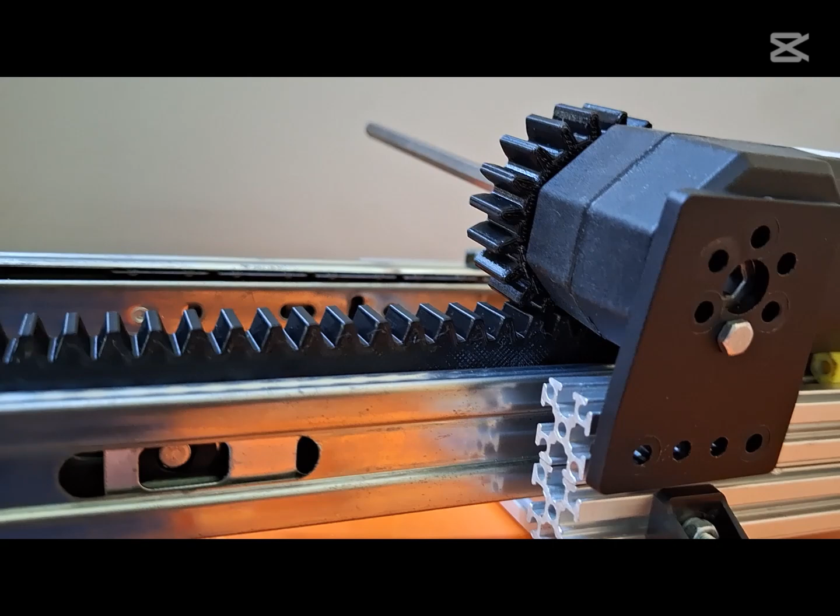Good morning, guys. I've created the rack and pinion system for a gripper that we created that can slide in and out with the rack and pinion. The problem that I have is that this bracket here in front of us is not big enough for this rack and pinion system, so we are going to have to create a new one.

Okay, great guys. We are going to create a bracket for the hex motor on our rack and pinion system. So the first thing I want to do is get this thing out of the way, and then we're going to start up FreeCAD, because that's the software in which I create all my stuff for the robots that we are using for First Tech Challenge.

Okay, so I'll start with a new document, create the body, create a sketch on the body and the XY plane. Okay, that's what we are going to do. So I'll move this a little bit. This is our origin point, for those of you who don't know.

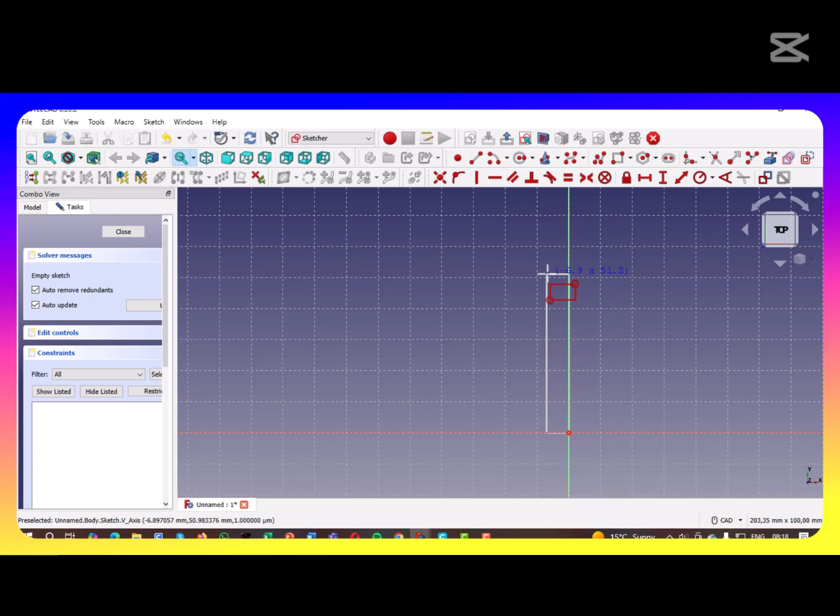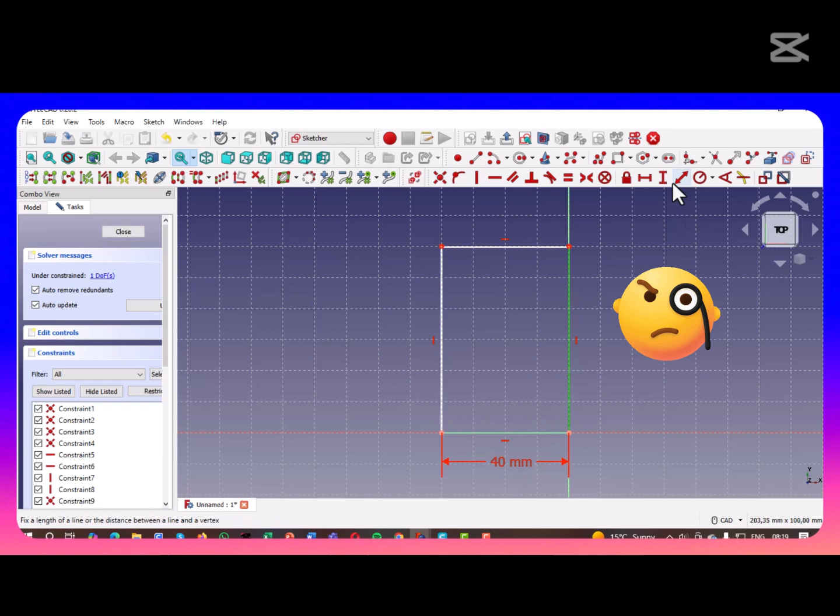And I'm going to start with a rectangular shape like this, roughly about the size as the brackets that is provided within the Tech Challenge set. So the width is about 4 centimeters, 40 millimeters, and this is where the difference comes in. The length is a little bit longer because our bracket is shorter than the one in the box, shorter than this one that I wanted to create, to make sure the rack and pinion fit. So this will be the first and the start of it.

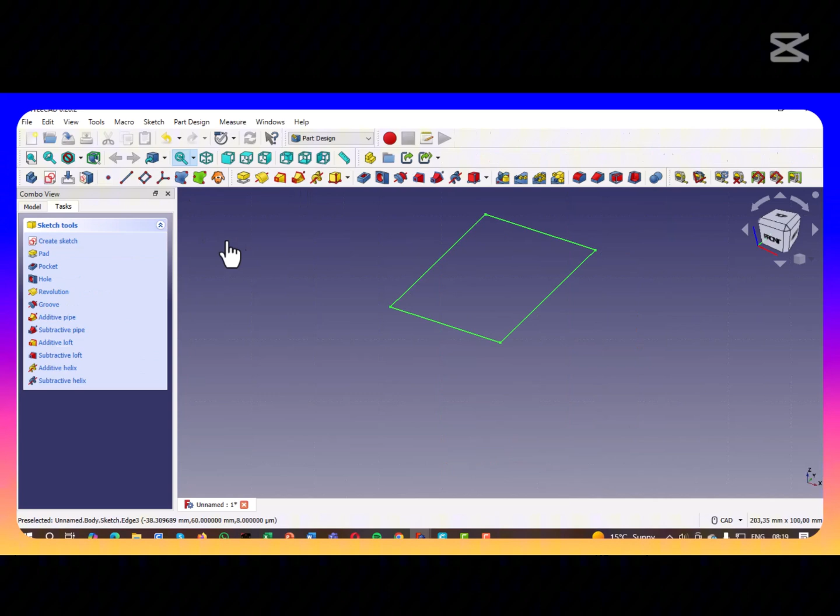So 40 by 60, and we are going to close this, let's pad it. Normally when I do this, I'll pad it around about 4 millimeters. Okay, and then on this plane I'll click and I'll create a sketch on this plane.

So if you have created anything for the Tech Challenge robots yet, you will know that the extrusions are 15 by 15 millimeters. So basically halfway there is where the slot is of the extrusion. Okay, so I'm going to do this.

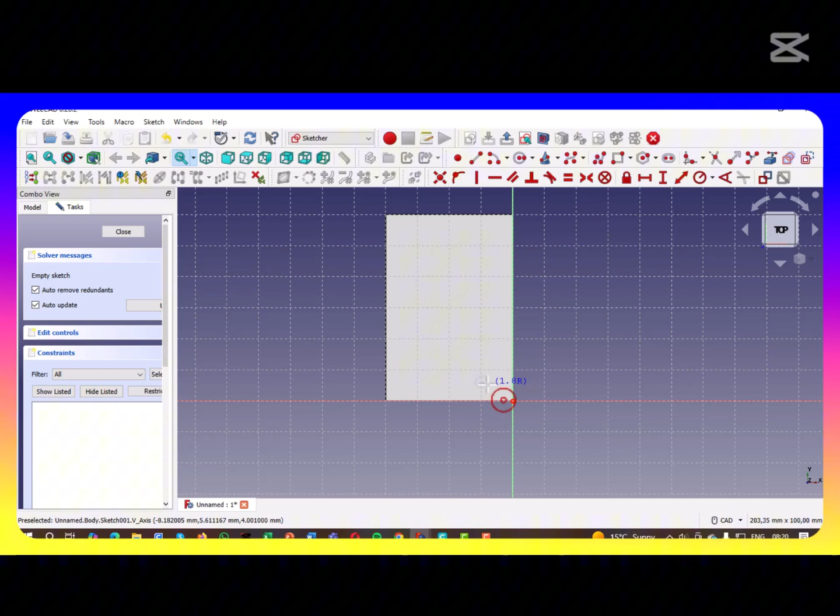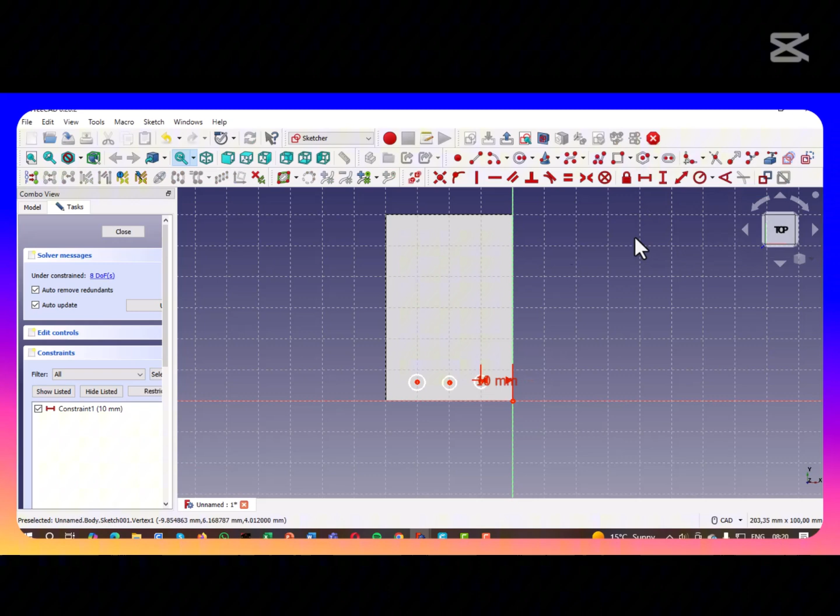I'm going to create 3 holes for nuts to fit in, to connect it to the extrusions like this, and I'll right click to get out of the creation tool. So first of all, I'm going to set the distance for this one to 10 millimeters, and then I'll just paste them.

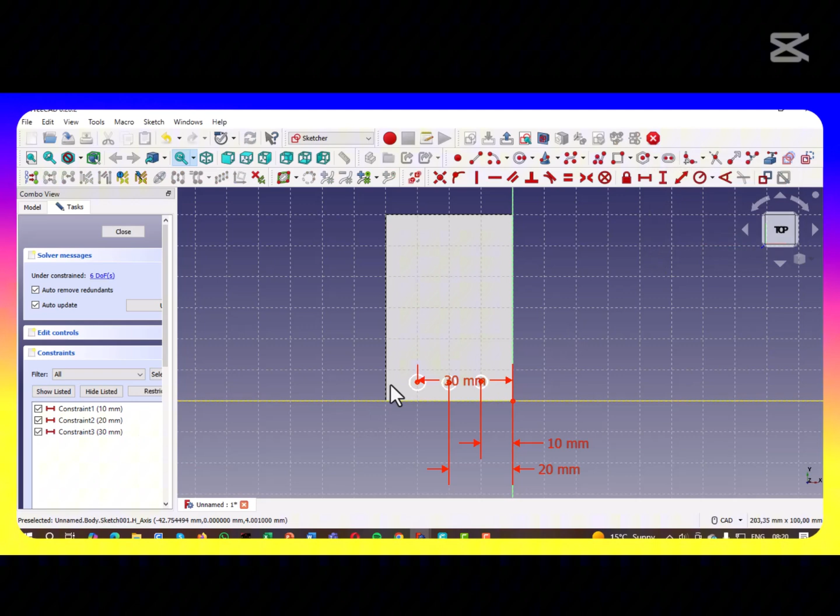So that one from there to there, you can see 20, and I'll move them up, and from there to there we'll set it at 30. That will give us the distance that we need.

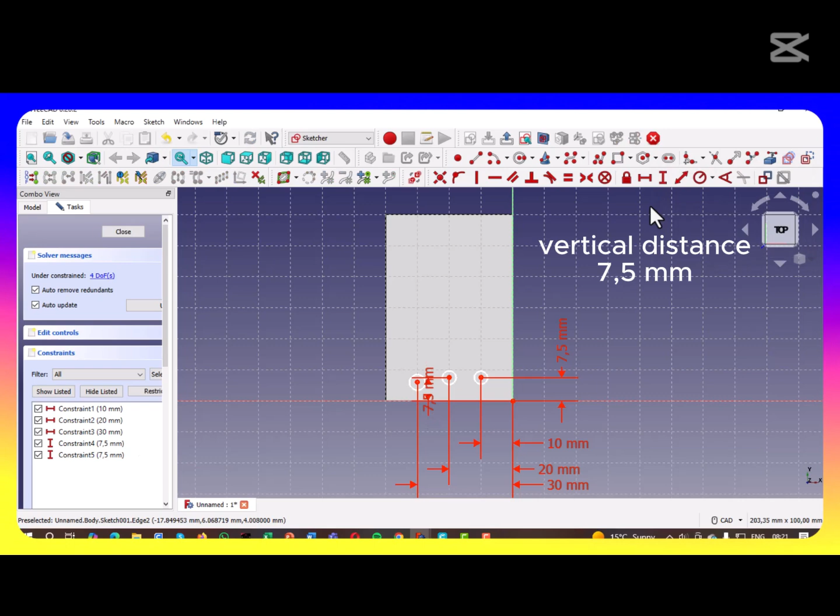Now the height is halfway of the width of the extrusion, which would be 7.5 millimeters. So we'll set it like 7.5 millimeters for each one of these. Let's just do it again, from there to there, 7.5. And from there to there, 7.5. We've got the height right.

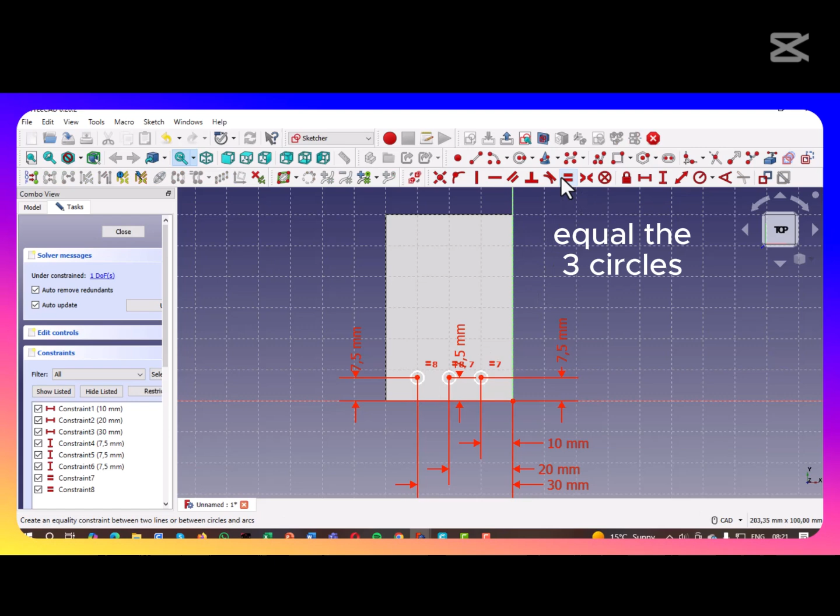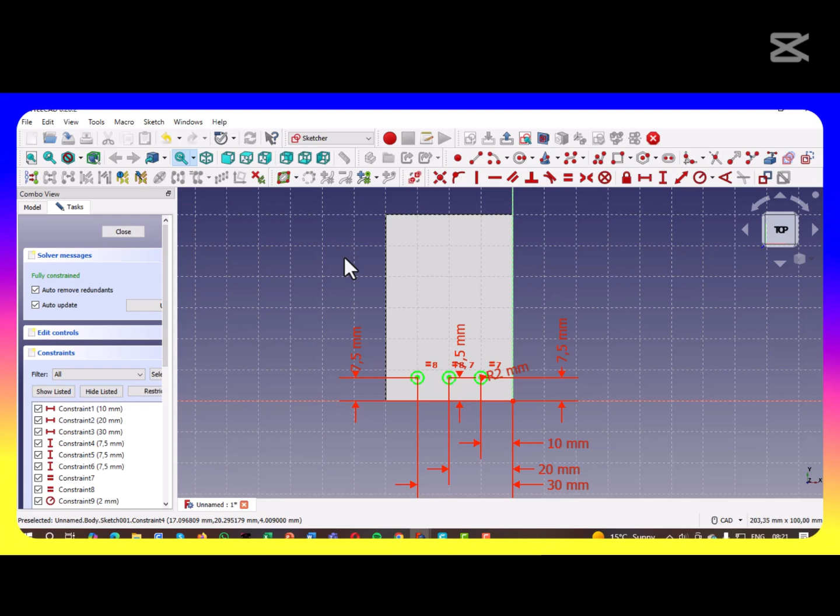Now I tend to do this: select the 3 circles and equal them so they're the same size, and then I'll set the size of the circle to 2 millimeters on the radius, which means it's 4 millimeters. It's a little bit bigger than it should be, but if you made a mistake and didn't get your measurements quite right, it gives you a little bit of leniency, else you're going to waste a lot of space or filament creating things, and then it doesn't work, which is time consuming and wasteful.

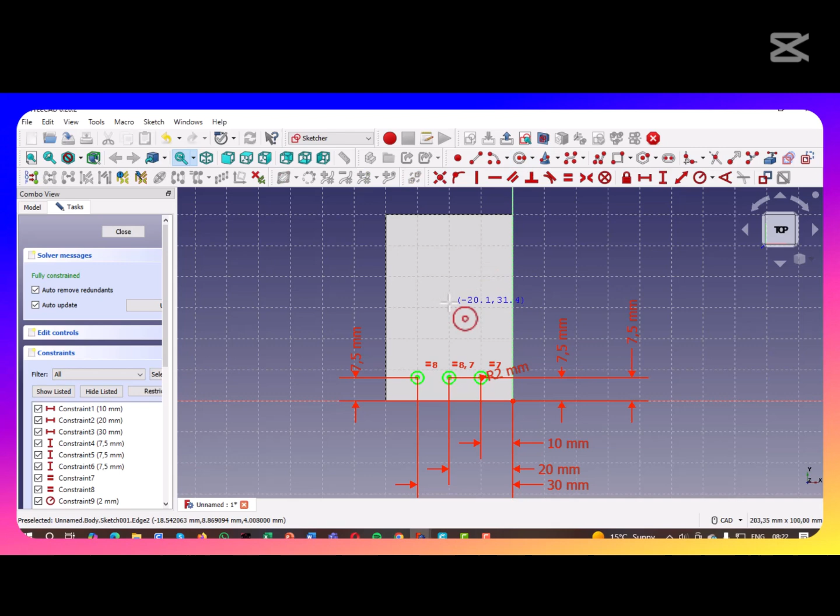So next in line, what we need to do is create the bracket or the fittings for the motor itself. Now this is supposed to fit to the extrusion, so from here upwards you're going to look at the measurement of roughly 20, 25, 26, let's see, I'm going to create a hole there, and then from here up to there I'm going to set it to 27, that would be just fine.

And remember, if you create this, you always have to constrain it both ways, vertical and horizontal, on a 20 millimeter line. And we'll set this one again to the same size as one of these, and we just equal it. Now those are equal.

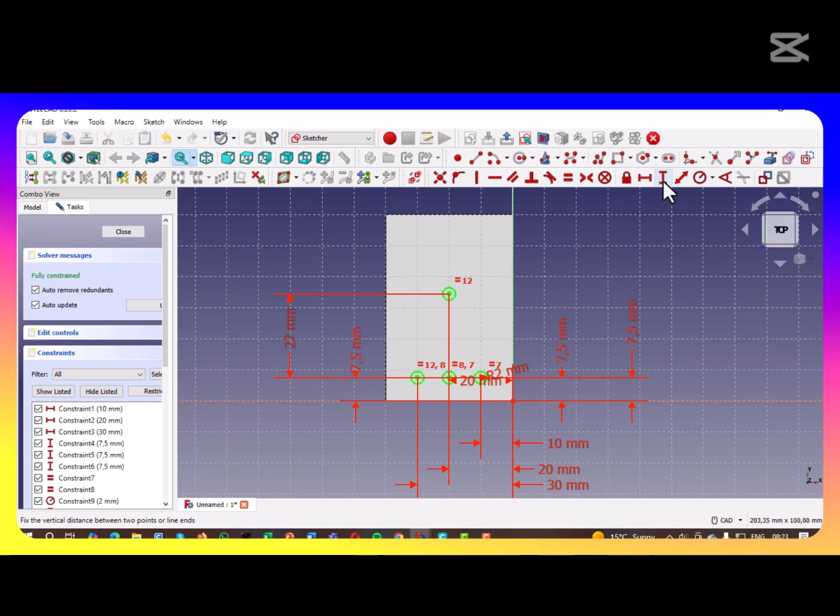So the next thing is the distance between this hole and the top hole where you connect the nuts for the motor is normally 17 millimeters. So I'm going this way. I'm going to add another hole like there, and from here to there I'm going to set it to 17 millimeters. That's pretty much about how far it should be apart. Again, I'm setting this to this, equal.

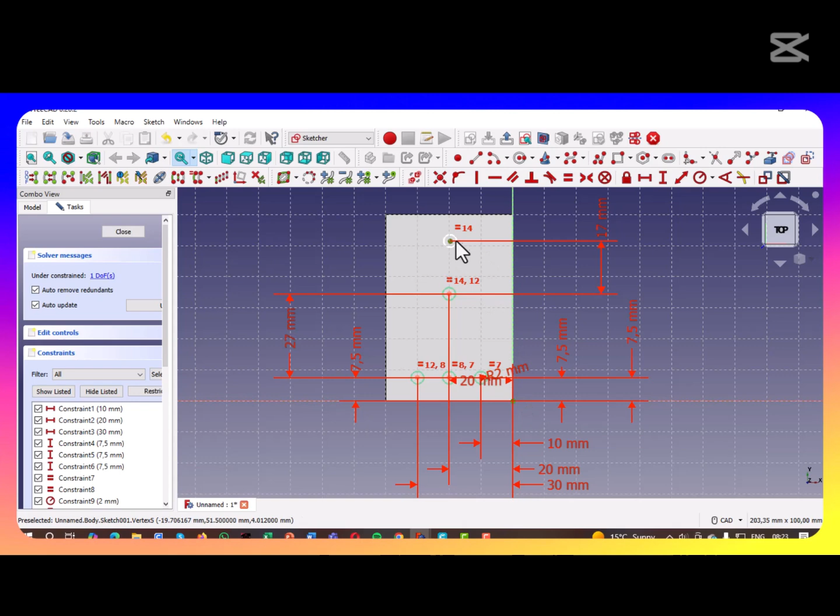Normally it will give me what I need, a little bit of leniency. If I made a mistake somewhere, it won't be the end of the world. So there we go, now all of these are already constrained. You can see it's fully constrained there.

So the next thing I'm going to do is create a big hole for the axle to go through, and I'm going to put it in between here, straight in the middle. So I'll just create it. It should be 5, so let's make the size of it 5.

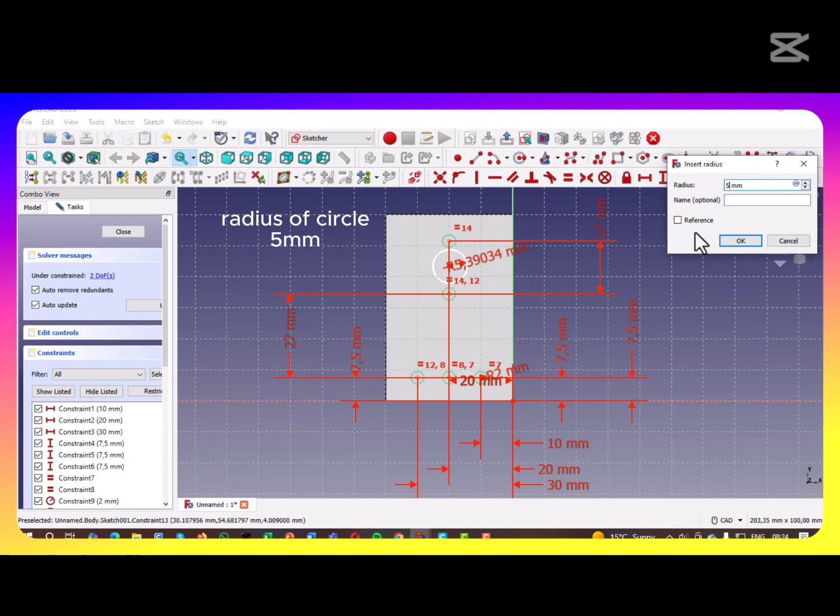That's for your bearings, your nylon bearings to fit in. And I'm going to put that again on a 20 millimeter line. That's an easy way to create the thing.

Now I'm going to set the distance from here to there, because this is a fixed point. So from here to there I'm going to set the distance to 8.5, smack in the middle between this circle and that circle. It should work just fine.

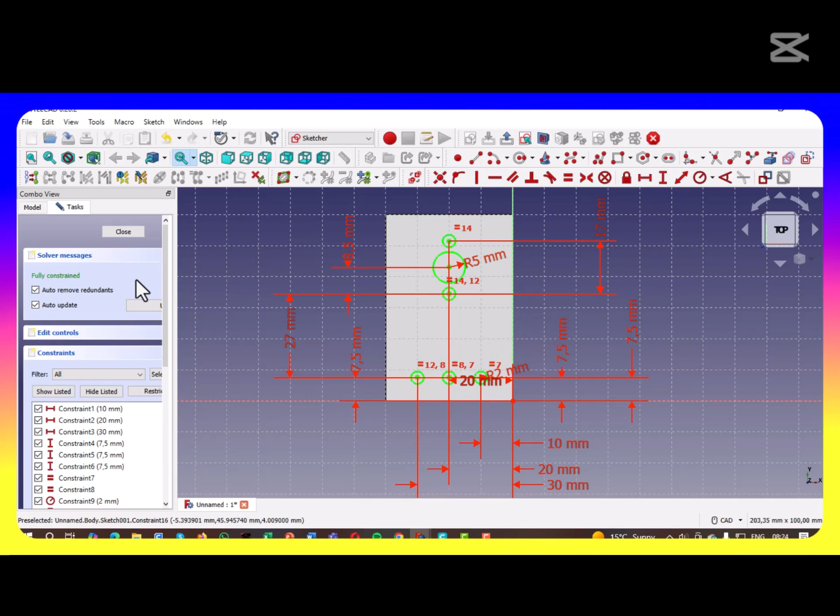Now we've got all the holes that we need for this thing, so we can close it. If it's fully constrained like that, we close it, and then we'll put the hole through it like that. Now we've got a plate, a bracket plate for the motor. The motor fits here, and these holes are to connect the plate to the extrusions.

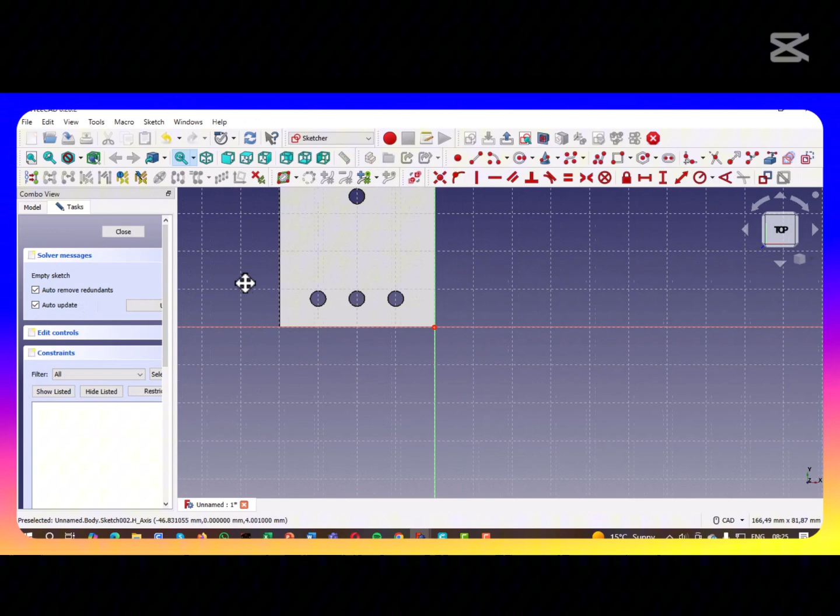And if you want to, you can do one more thing. Oops, cancel, I click on that. Let's create a little bit more. What we are going to do, just to make the thing a little bit more stable, is create 2 small blocks on each side like this.

So from this point up to this point, the height would be 6.5, because the distance to the middle here is 7.5, but this thing is going to be 2 millimeters. So you're going from 6.5 to 8.5, that's what we're going to do.

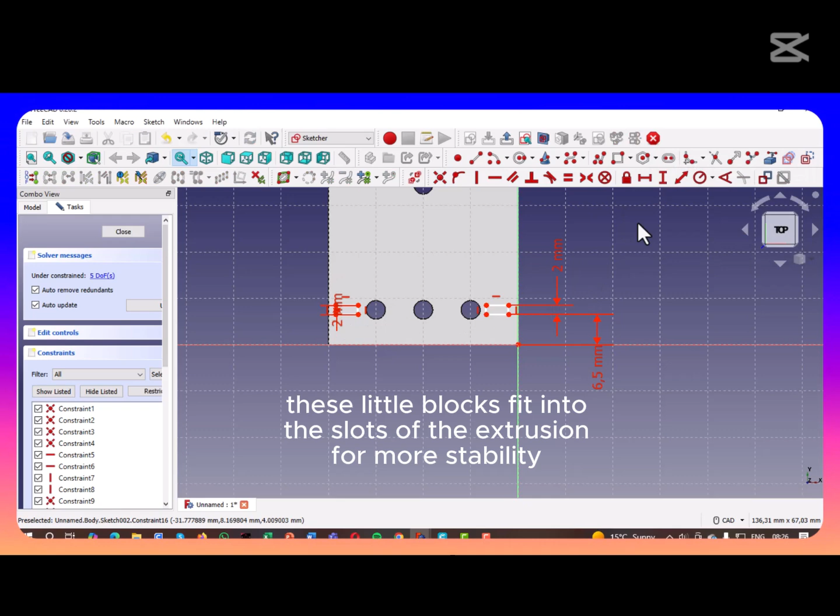So that distance is 2 millimeters, and we'll do the same with this one. That distance is 2. Just slot it in, it makes it so much more stable if you do it like that. So from here to there, the height would be 6.5 again, and that is set.

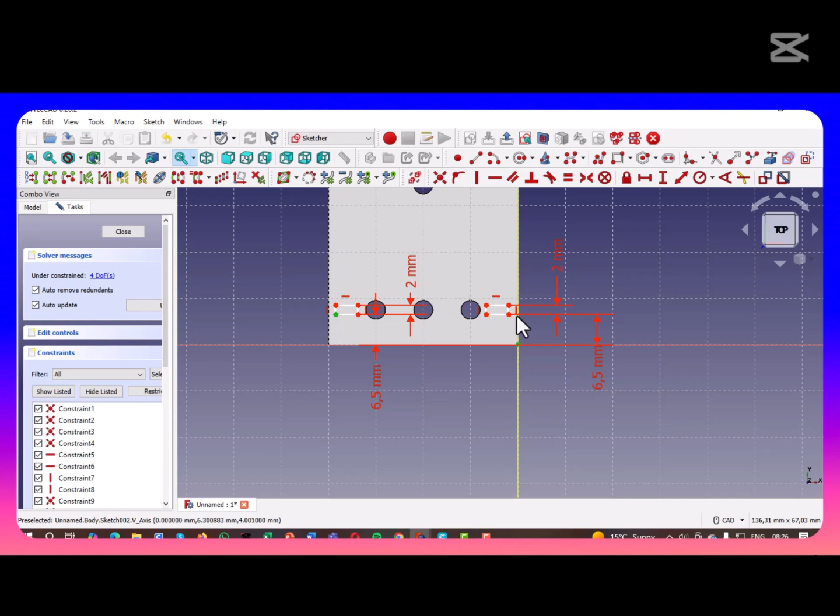And the distance from here to there, I've done this one, let's see, I haven't done that one yet, so I'm going to set that distance to 38, and the distance from here to there, from this side to, okay let's just do this, from there to there, distance 2 millimeters. Now we've got 2 millimeters to each side, which is fine.

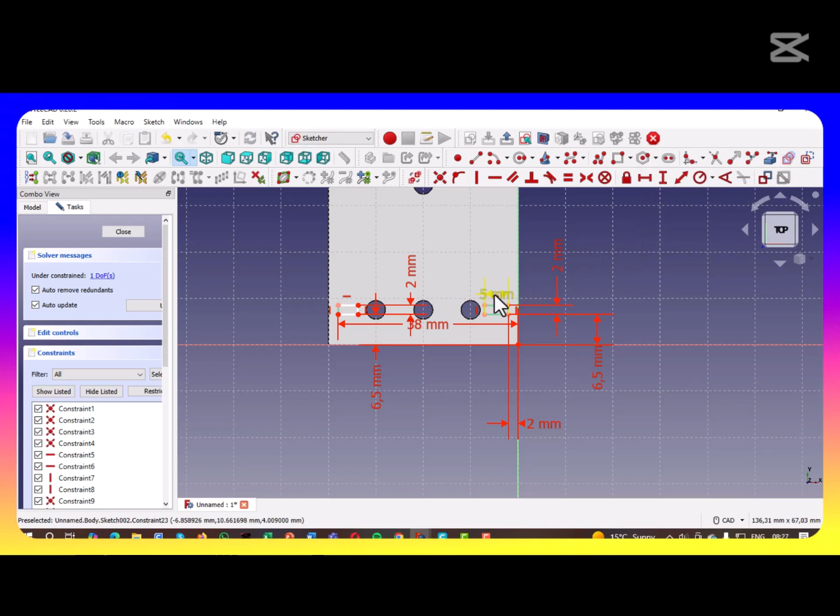From that side to that side, and now we set the length of this thing. We'll make it 5 more. No, it's going to be too long, so I want to change that to 4.

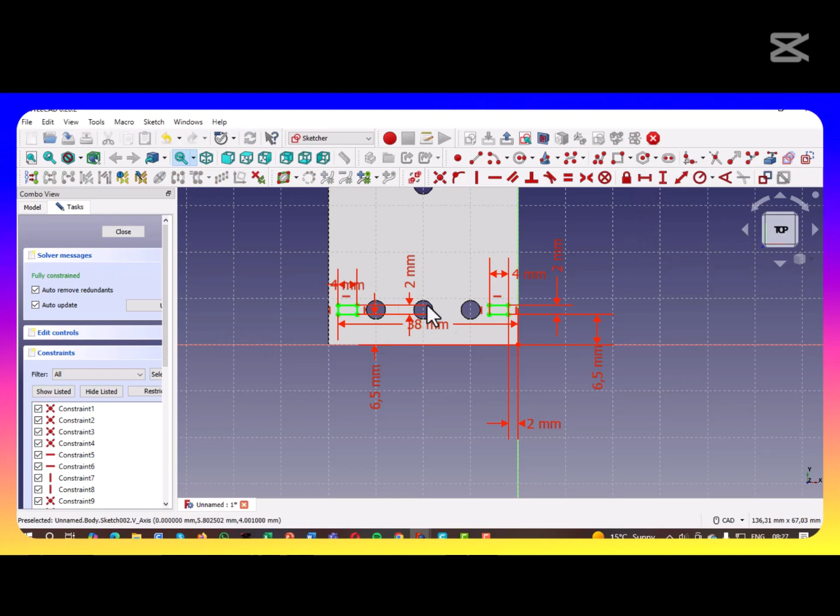Because the head of the nuts will fit there, and we don't want to make it too close to that hole, then it's going to mess up everything for us. So length there 4, that should be fine. It is fully constrained again, it should work for us. Fully constrained, close, and we extrude it 2 millimeters high, so we'll just go down to 2 millimeters like that. So, okie dokie, there you go.

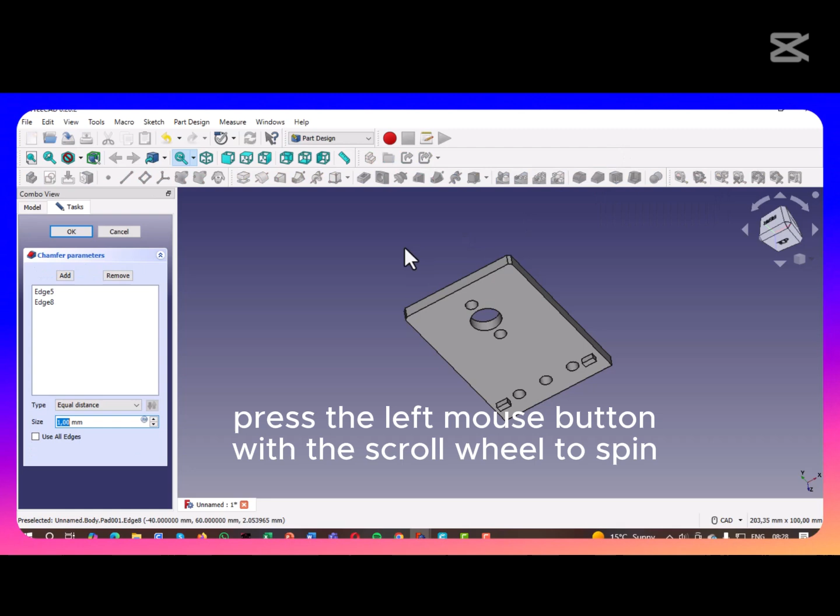Now this is what the plate looks like at the moment, so let's do one more thing with the plate. I'm going to turn it a little bit so I can select that one, press Ctrl to select that one also, and then chamfer it a little bit to just make the thing look a little bit better like that. Okay, that gives us the design that we want.

This is the plate that we designed for our X motor to fit on a rack and pinion.